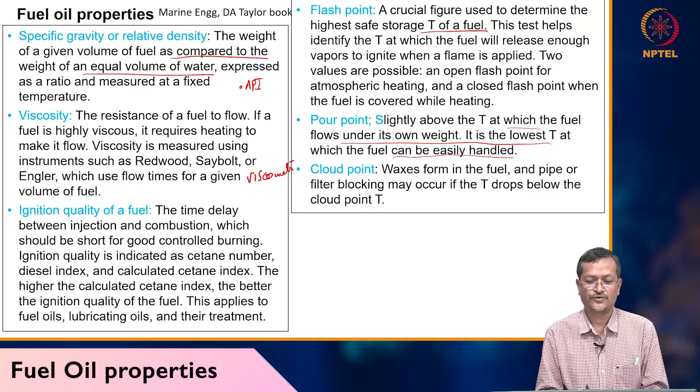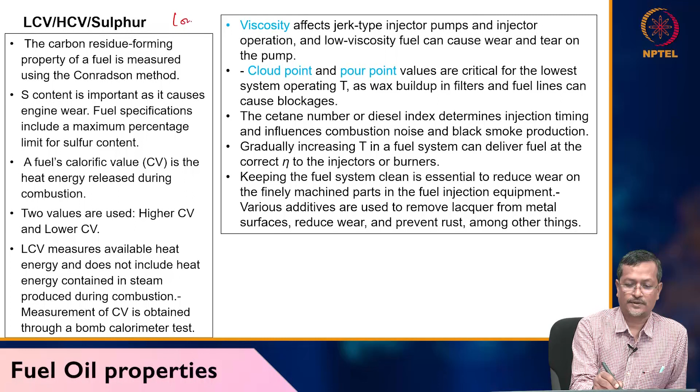LCV, HCV, sulfur. LCV means lower calorific value, HCV means higher calorific value. The carbon residue forming property of a fuel is measured using the Conradson method. Sulfur content is important as it causes engine wear. Fuel specifications include a maximum percentage of sulfur content.

A fuel's calorific value is the heating value, or how much heat is released from a fuel after combustion. Two values are normally used: higher calorific value and lower calorific value. LCV measures available heat energy and does not include heat energy contained in the steam produced during combustion. Fuel can have a certain percentage of water.

When you burn the fuel, water will take latent heat and sensible heat, and after combustion that heat will not give you any value. Water will take that heat with it. If you have a higher water content, water will take lots of latent heat and go away with your exhaust gas. So a fuel with a lower amount of water or H2O vapor is better. LCV measures available heat energy and does not include heat energy contained in steam produced during combustion.

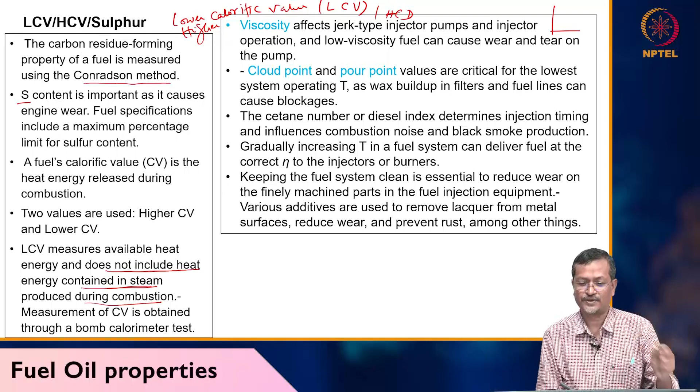Viscosity affects jerk type injector pump and injector operation, so viscosity is very much important. It is temperature dependent also. If you increase temperature, viscosity will be down. So if you are changing temperature, viscosity will change, and your system can fail, or engine can stop working because it is not flowing into the engine. So in that case maybe you have to increase temperature before putting into the cylinder.

Oil treatment is essential for both fuel oil and lubricating oil before they can be used for engine. The process of oil treatment involves storage and heating to allow water separation, filtering out solid particles through coarse and fine filtering, and centrifuging action also you have to do.

Centrifugal force, let's say if you take certain amount of fluid, and if you rotate at very high speed, because of high speed, different density fluid particles will be creating different layers. For example, there will be one layer of high density, and near the center of the axis low density fluid will be getting accumulated. So in that way you can separate the impurities from oil, petrol, diesel, grease, or your lubricating oil.

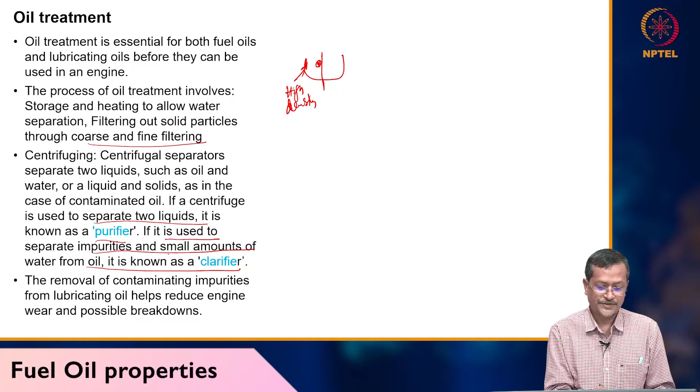If centrifuge is used to separate two liquids, it is known as purifier. If it is used to separate impurities or small amount of water from oil, it is known as clarifier. So you see the difference between purifier and clarifier. Impurity being a small amount of water also, that's called clarifier.

To remove contaminants and impurities from lubricating oil helps reduce engine wear and possible breakdown. So lubricating oil's purpose is to increase smoothness when one rotating surface or sliding surface is there. If they are getting very much high friction, what happens? In that case, you put some lubricating oil, so it will be moving smoothly and reducing wear and tear.

But if you have some contaminant, let's say some sand particle, when one surface is sliding over other or rolling, that solid particle will be rubbing against any of the surfaces or both surfaces. So in that case, wear and tear will be more, and your system can fail quickly.

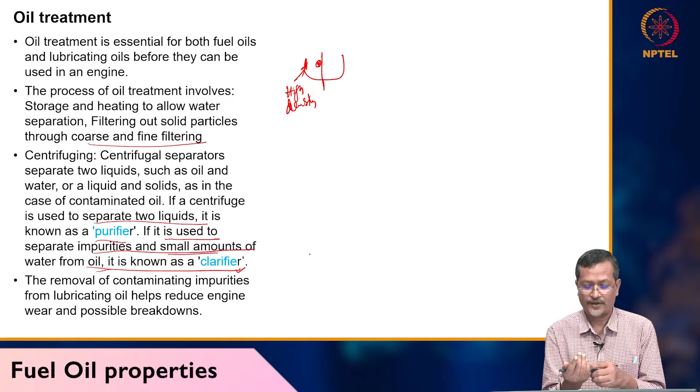Fuel when burning in combustion chamber, some terms are used. One term is called stoichiometric ratio. The ratio is defined as the mass of air divided by mass of fuel, this is mass ratio. Stoichiometric mixture is the ideal air fuel ratio for complete combustion.

The oxidation reaction you can see for C8H18, which is normally the common fuel for petrol engine. For this one, your air fuel ratio is 14.7 is to 1, or the stoichiometric ratio. If you have more fuel or more air or less air, then your stoichiometric ratio will change.

Equivalence ratio is air fuel actual divided by air fuel ideal or theoretical. Lambda less than 1 is rich mixture, lambda more than 1 is lean mixture, and lambda equal to 1 is called stoichiometric ratio.

Some fuels will have different stoichiometric ratios based on their molecular weight. You can see CH3OH has 6.47 air fuel ratio, hydrogen has 34.3. Whenever you are calculating air fuel ratio, you need to know this molecular mass: hydrogen is 1.008 atomic mass unit, carbon 12, oxygen 16.

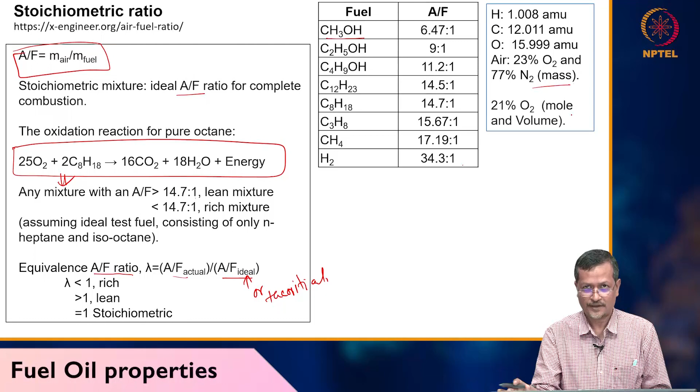Air is 23% oxygen, 77% nitrogen by mass. But if I consider mole, then 21% mole of oxygen is there in air. So that gives the stoichiometric air fuel ratio.

So here you see this figure, power, and this is air fuel ratio. Air fuel ratio, this curve is the fuel consumption curve, and this is called the power curve.

For a gasoline engine, for example, it is given lambda equals 1 for this line, and the actual air fuel ratio is 14.7 is to 1. On the right side of lambda equals 1, the value is given like 15.4 is to 1, with lambda equals 1.05, this is A by F. But on the left side, it is given like 12.6 is to 1 A by F, lambda equals 0.86, and maximum power you are getting here.

But here is the best fuel economy.

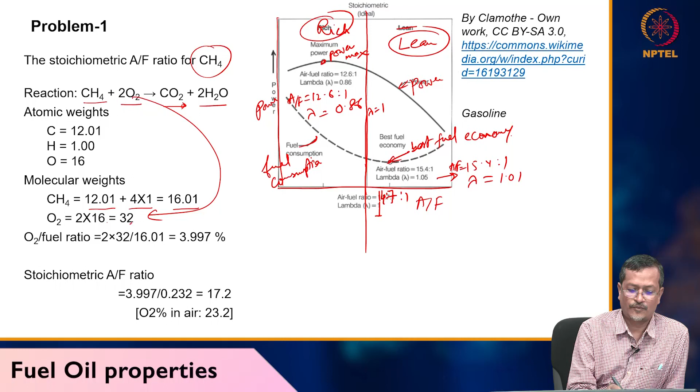So oxygen by fuel ratio, not air fuel, this is oxygen by fuel ratio. 2 into 32 since 2 oxygen molecules are there, and fuel molecular weight is 16, so totally you get 3.997 or 4. Stoichiometric air fuel ratio is 3.997 divided by 23.2, where 23.2 comes from oxygen being 23.2 percent by weight. So air fuel ratio comes to 17.2.

So each fuel has its own air fuel ratio. Here in this figure, C8H18, this fuel has an air fuel ratio of 14.7. This is basically petrol engine fuel.

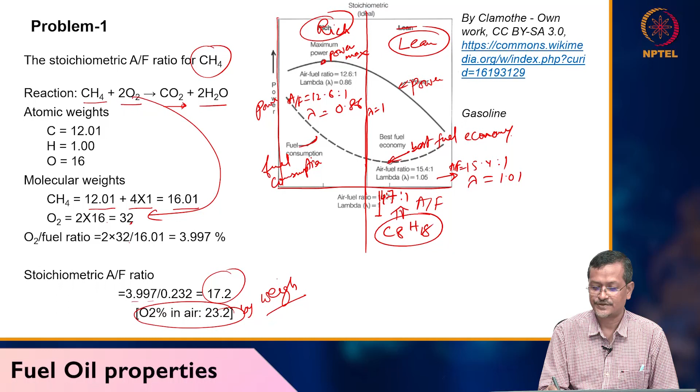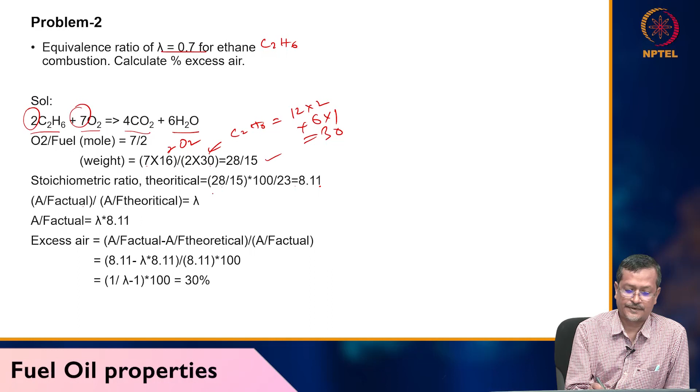Stoichiometric ratio theoretical is 28 by 15 into 100, so you get 8.11. Air fuel ratio actual by air fuel ratio theoretical gives you lambda. If you solve this, finally you get excess air as 30%.

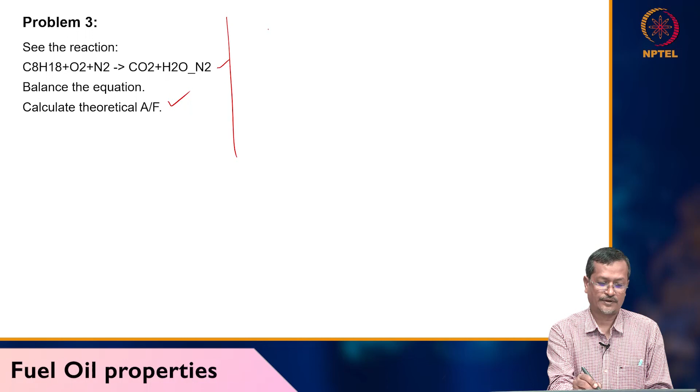Another problem: C8H18 again, with oxygen and nitrogen. First you have to balance the equation and calculate theoretical air fuel ratio. To balance it, you put C8H18 plus 25 by 2 oxygen plus 3.76 nitrogen equals 8 CO2 plus 9 H2O plus 47 N2. For balancing, 79 by 21 percent N2 ratio gives 47 N2.

Theoretical air fuel ratio, using mole not weight: 25 by 2 mole oxygen plus 47 mole nitrogen, divided by 1 mole C8H18. This gives 59.5 mole air divided by mole fuel.

So theoretical air fuel ratio equals 59.5 into 28.84, divided by 1 into 114, giving 15.1 kg of air divided by kg of fuel. So this is your solution.